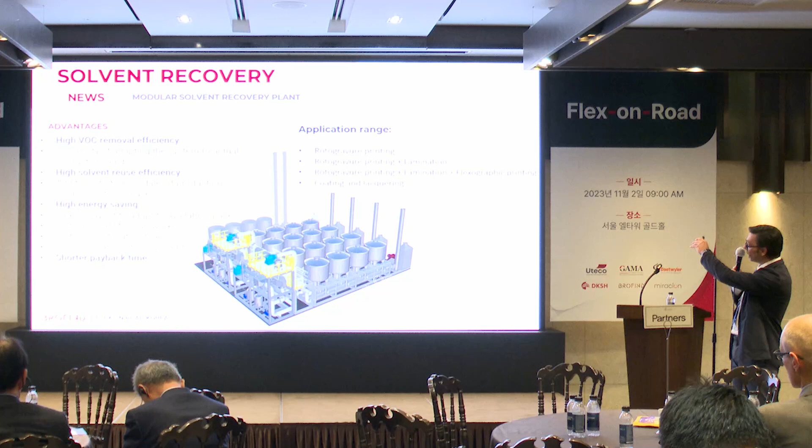Because with this technology, basically you can stop buying the solvent for dilution. The high energy saving means solvent not produced, therefore not outsourced. The modular solution also gives flexibility, because we can design it like Lego, and the solution can be applied in all the technology range of flexible packaging.

How does it work? We collect in a common duct, and we deliver the emission gas to adsorption. Adsorption is basically a multiple carbon bed. When the carbon is full in terms of adsorption capacity, we start the regeneration. The regeneration could be made by nitrogen or steam, depending on the nature of the chemicals.

At this stage, with the solvents, we can condense. At the condensation, we basically have a blend of solvent or monosolvent, depending on what we input into the plant. According to the quality, the purity, and the type of solvent you should use in production, we can reach different levels. You can reuse it as it is. You can resell to the solvent supplier if you wish, or in case you want low water content, we can go through dehydration, and finally to distillation if you would like to separate the solvent from the blend.

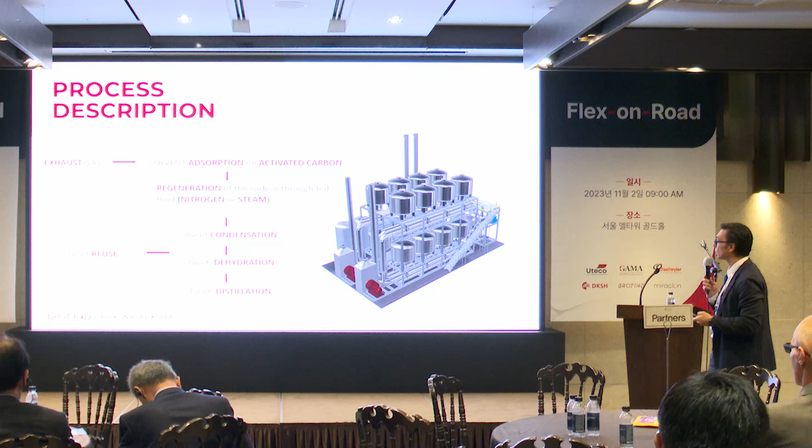The selection of the solvent recovery technology depends on the nature of the chemicals. Steam for solvents not soluble in water. In case of partially or water-soluble solvent, we should move to nitrogen. In flexible packaging, basically all the solvent recovery plants are made with nitrogen regeneration, because ethyl acetate and alcohols are the most popular in flexible.

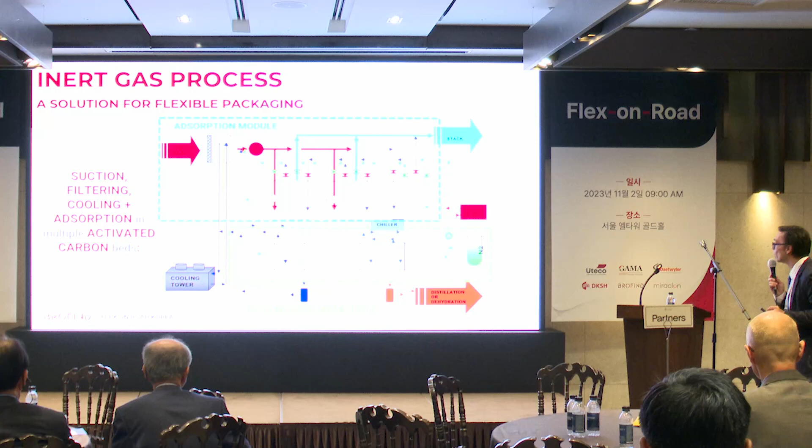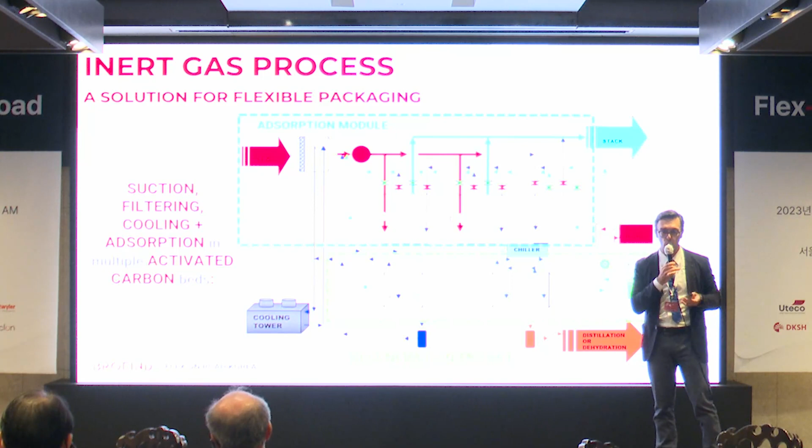Let's go now to the scheme; it's not easy, I try to make it simple. We are sending the solvent-laden air to a condensation, cooling and filtering group, because the active carbon beds work at their best below a certain temperature, roughly ambient, let's say below 35 degrees. So we should cool down. Then we pass through the active carbon, which adsorbs the solvent. When the carbon bed has reached its limit, we close it and start the regeneration. Passing through the active carbon, we can release to the stack below the emission limit you would like to grant.

So at this stage we have the carbon full of solvent. The first step is sending the nitrogen, which is going to inertize to prevent fire hazard risk. When the oxygen is removed, which we monitor with a sensor, we may start to heat. It could be either by thermal oil or electrical heating. When we reach about 200 degrees, we desorb all the water first and the solvent later on. Okay?

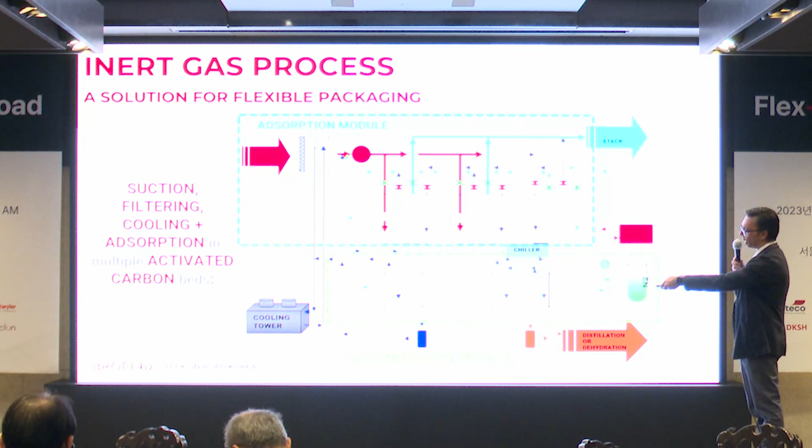After desorption, we condense through a multiple step phase using a cooling tower and then a chiller. We first condense the water, and secondly, we start to condense the solvent. We collect water and solvent separately in a temporary tank.

In case you need, this is a special step later, for instance in case of lamination with ethyl acetate, where you would like to use urethane grade ethyl acetate, meaning high purity. It can be achieved thanks to the use of molecular sieve. Molecular sieve is a particular step able to remove the water from the liquid phase, from the solvent, giving the max efficiency, and we can guarantee water content below 0.05%. So most probably less water than what you typically buy from a solvent supplier. The purity of the ethyl acetate we will achieve later on in distillation will be higher than 99.7%.

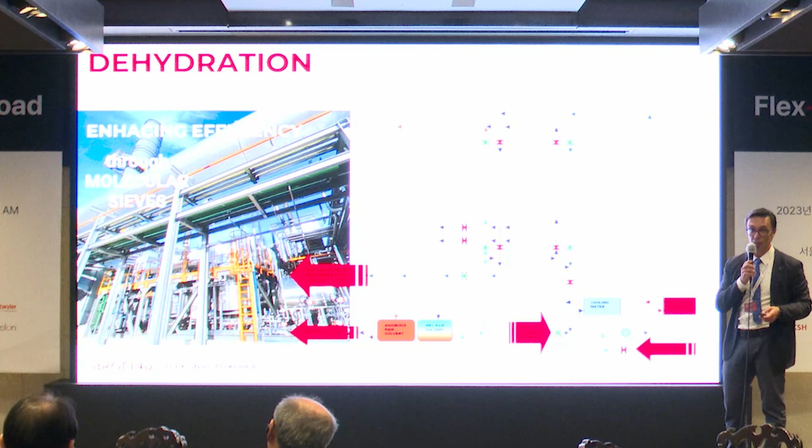In the second column, we can get the urethane grade ethyl acetate. In the third column, finally, the alcohols, if you also have alcohols. Otherwise, we can stay with 2 columns only. This is customized according to your output, according to the chemicals you are delivering to the plant.

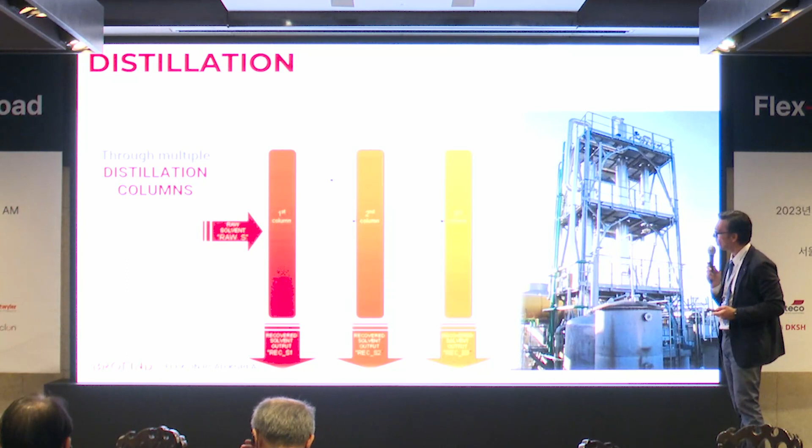This is interesting because I'm going to make a comparison also with the RTO. Of the almost 800 active plants installed, we can count about 60 plants of solvent recovery. The 60 plants were able to purify about 36% of the total amount performed by our plants, which means over 300 billion cubic meters.

Why is the technology so important worldwide? Because as I mentioned at the beginning, sustainability should be not only a cost, but an opportunity. And this is an opportunity, because you stop buying solvent. Sometimes our customers are even able to sell excess solvent to other players. We can estimate ROI, return on investment, in about 3 years. Not bad, I believe.

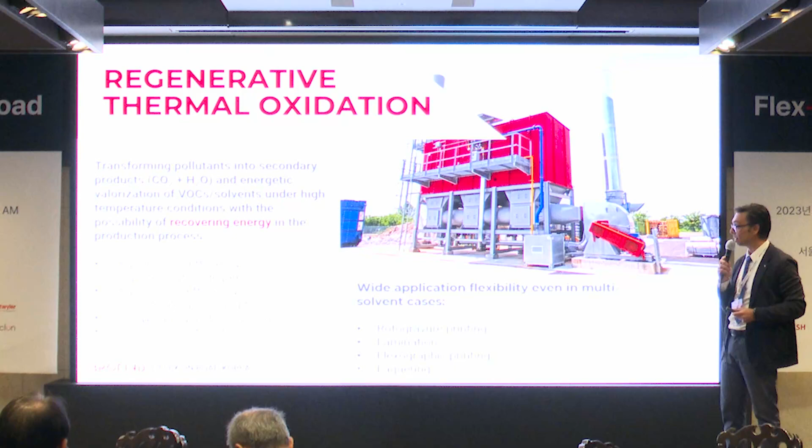This is interesting compared to the solvent recovery plant, because before we were taking into consideration 60 plants, now we are at about 200 plants. This number always relates only to flexible packaging, not the total industries. 200 plants were able to purify 20% of the emission we treat, which means 800,000 tons. So more plants, but less volume. So let's consider that for flexible packaging, the favorite solution worldwide is not the RTO, but the solvent recovery.

This is a considerably new technology in flexible packaging, the rotor concentrator. It's helped both RTO and solvent recovery to be more efficient, with a lower running cost. Why? Because anytime you have a high volume of airflow with low concentration, and you are sending it to the RTO or to the solvent recovery, you're obliged to design the abatement system with higher capacity.

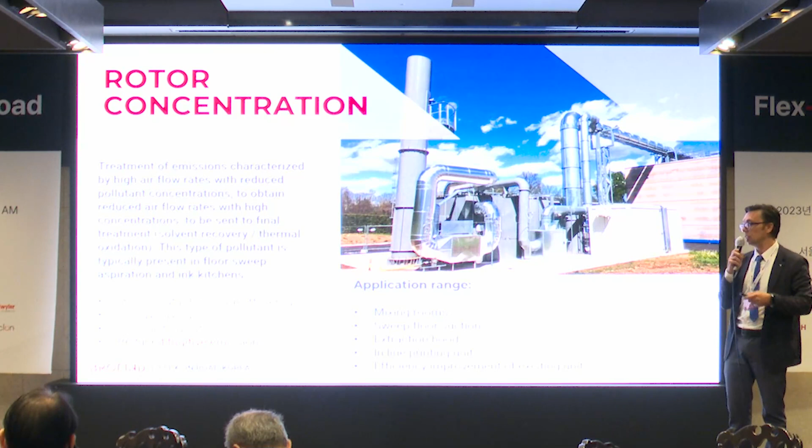Here we can collect what we call the fugitive emission. So in case in your machine you have the sweeping floor system, you are obliged to clean the air where the operator is acting. So how do you clean? You clean by removing that air. And typically this airflow has low concentration. What we do is send it to the rotor concentrator. The rotor concentrator cleans the majority of the air. Then the purified air goes to the stack. The minor part will be concentrated with an ideal solvent concentration to be delivered to the RTO or solvent recovery. This makes both plants more efficient.

So this is just to show you it is a relatively new technology, but it is going up in terms of sustainable and more efficient systems. We do believe it is going to play a good role. Everyone is talking about decarbonization. For us, it is already a reality because both RTO and solvent recovery could be equipped with a full electrical solution. That means no CO2 emissions, no carbon is going to be used. So this is already a solution for us.

Having so many plants and units worldwide, we should also focus on services. That's why we are able to give assistance and support 24/7. We are dealing with second hands. As part of our business, we are also doing revamping and upgrades on our plants, but also competitor plants. We are an engineering company, we have full capacity and energy to do such improvements. Some references of BROFIND, the 4 offices, as I mentioned. So far in China, we are definitely the market leader with about 200 units only in China.